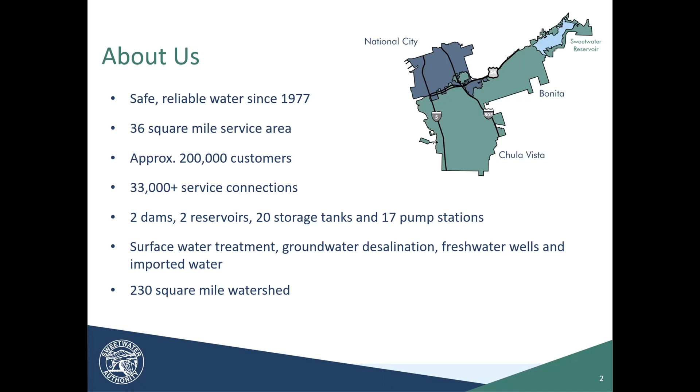And so, surface water sources and protection of those sources. So 2 reservoirs, as I mentioned: Sweetwater Reservoir, located here in Spring Valley, and Loveland Reservoir, located up in the Alpine area. The 2 reservoirs are actually connected via the Sweetwater River.

We're continually monitoring activity and development within our watershed and around our reservoir, because we have a vested interest in protecting the water quality in the reservoir. We have a team of watershed caretakers, which Eric oversees, and they play a very important role in not only operating our recreational programs, but also ensuring the security of our facilities, maintaining access points and roads, and brush clearing around the reservoir properties.

We of course monitor water quality in these reservoirs to keep track of making sure it's good water quality and meeting all the state and federal drinking water regulations. We also have what's called an urban runoff diversion system, I'll show you that on the next slide. And we have a comprehensive habitat management program that I'll talk a little bit more about on another slide.

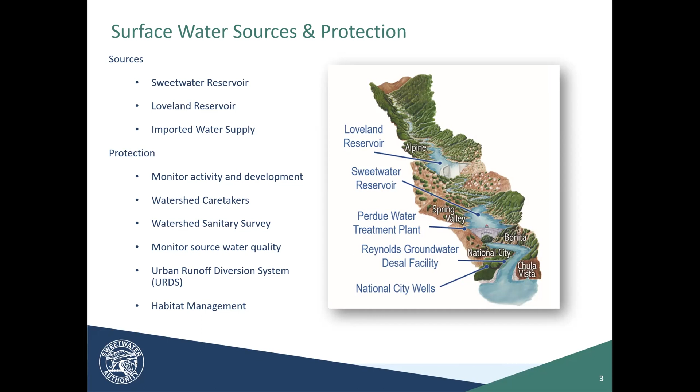Our urban runoff diversion system is actually a pretty unique system for a surface water reservoir. If you've ever driven down Jamacha Boulevard, you may have noticed some ponds just to the north of the reservoir. Those ponds are actually part of the urban runoff diversion system.

The purpose of those ponds is to divert water into the ponds that we don't want going into the reservoir. So if there was a chemical spill or some kind of contaminating activity going on, we don't want that water to go into the reservoir. We can catch it in the ponds, or just a first flush event. So after a long dry summer, a lot of debris and things you don't want in the reservoir build up in the streets, and we capture that water in the pond so it doesn't enter the reservoir.

Yes, I see a question. This is Laura, are you going to take questions at the end, or do you want us to just interrupt you? Either way, go ahead. We will take questions at the end, but you can go ahead and ask a question. No, I can wait till the end. That's no problem, I'll wait. Okay, alright, Laura, I prefer you do that. Thanks.

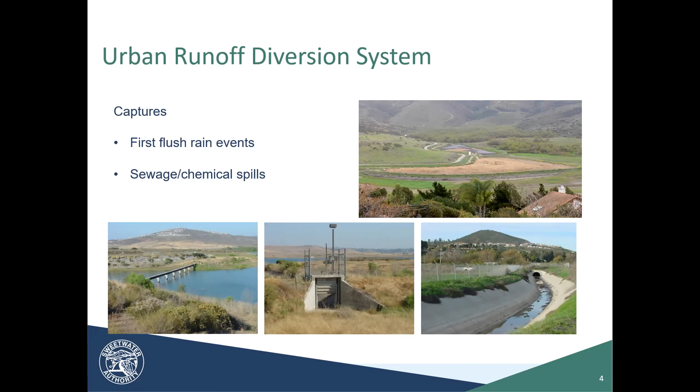So that's our urban runoff diversion system, very important to protecting water quality in Sweetwater Reservoir. We also have a habitat program that we employ to maintain natural flora and fauna around our reservoir. One example is coastal sage scrub, a natural species, but we really do our best to protect the natural environment around here and try to maintain natural plants versus invasive plants.

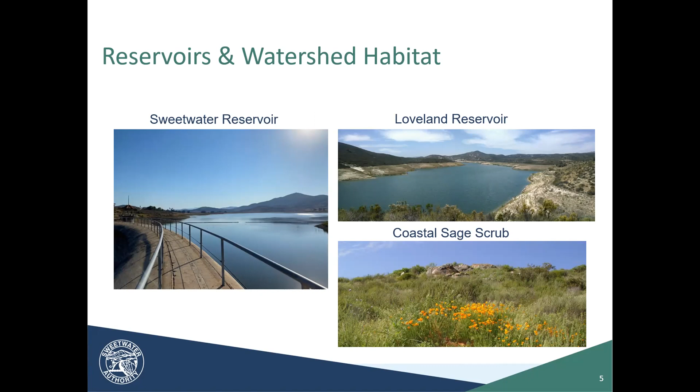This is really conducive to a healthy watershed, and there's a strong nexus between water quality in your reservoir and a healthy watershed, because these plants in this natural environment also act as natural filters, protecting water quality and keeping things like erosion and sediment from accumulating in the reservoir, which would degrade water quality and make treatment more difficult.

Adjacent to Sweetwater Reservoir, we have the Perdue Water Treatment Plant. This is our terminal reservoir where we withdraw water and then treat it for distribution to the public. The primary source for the Perdue Water Treatment Plant is Sweetwater Reservoir and Loveland Reservoir.

But when we don't have local water available, because the reservoir may not always be full, we do have imported water connections to the San Diego County Water Authority. They purchase water from Northern California and the Colorado River system, and then deliver it to a multitude of member agencies in the region.

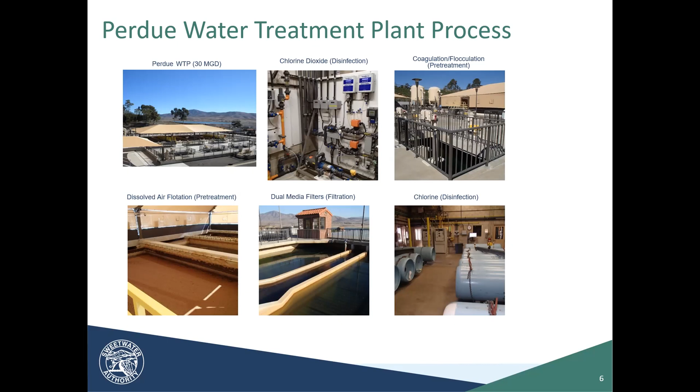The Perdue Water Treatment Plant can process up to 30 million gallons of water per day. It's a multi-step water treatment process, but really the primary objectives are removing total suspended solids from the water, removing color, removing odor, and then inactivating any viruses or bacteria before it's delivered to the authority's customers.

The authorities are also fortunate in having local surface water supplies, and we also have groundwater supplies in National City and Chula Vista. In National City we have what's called our National City Wells, a 2 million gallon per day fresh groundwater source. It's actually one of our most affordable water sources.

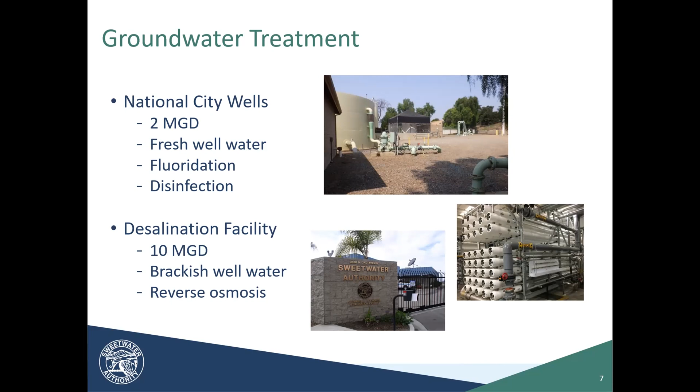It's fresh groundwater, and we simply fluoridate it and disinfect it for drinking water purposes. Then we have the Richard A. Reynolds Groundwater Desalination Facility in Chula Vista, located on 2nd Avenue adjacent to the Sweetwater River. It's withdrawing brackish groundwater, which is salty but less salty than seawater, from what's called the San Diego Formation, a big underground aquifer. We're using reverse osmosis technology to reduce the salt content for potable water purposes. Again, another very valuable local water resource for the authority.

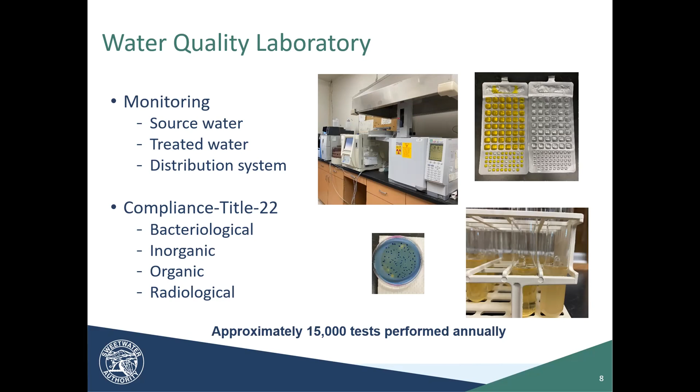All the water we produce and the source waters we monitor, we need to check somehow. So we have our own state certified water quality laboratory, located on the property of the Operations Building at the Perdue Water Treatment Plant here in Spring Valley. We check our source water, our treated water leaving the treatment plants, and also the water out in the distribution system prior to being delivered to the customer. We're looking for bacteriological, inorganic, organic, and radiological constituents, performing about 15,000 tests annually in the water quality lab. At this point I'll hand it off to Eric.

Thanks, Justin. Speaking now about the recreation opportunities around Sweetwater Reservoir specifically, since that's the one adjacent to your community: we have a network of hiking trails, and besides hiking there's also biking and horseback riding allowed. This network of trails is operated through an easement granted by Sweetwater Authority to the County of San Diego.

There's a trailhead that starts at what's called the Sweetwater Summit Regional Park, located towards the south side of Sweetwater Reservoir in the community of Bonita and Sunnyside. That's a county park, not our park, but it's adjacent to our property, and that's where the network of trails initiates.

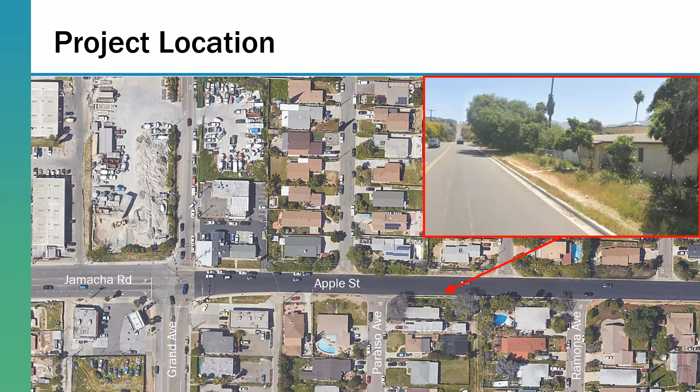So this is going to be sidewalk on the south side of Apple Street between Grand Avenue and Ramona Avenue. You can see in the aerial view that Jamacha Road has sidewalk already, and then as you go on to Apple, it ends. In the street view, you can see there is a place to walk, but it's very narrow and not ADA compliant.

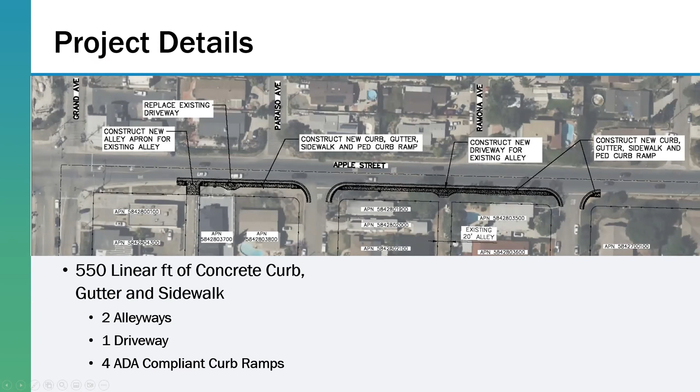So the project is 550 linear feet of concrete curb, gutter, and sidewalk. It starts at the end of the existing sidewalk, crosses over Ramona Avenue to the other side, and includes 2 alleyways, 1 driveway, and 4 ADA compliant curb ramps.

I wanted to spend a little time on the history of the project. I understand the CPG priority list has been updated - it was updated last year, but on the old list you had Apple Street on either side of Grand Avenue, east of the intersection, and then going down toward Galapagos Street and Maya, that intersection down there.

I used to be the liaison for the county with Spring Valley CPG, and I used to attend the Spring Valley revitalization meetings. So I was very aware of all the sidewalk priorities you had, and it was always number 1 on the infrastructure list. So I did apply for grants to try to win some money to do these sidewalks, and Apple Street was one that kind of rose to the top. It checked a lot of the boxes for what typically wins grants.

It's an underserved community area, and it is a direct access to essential services and schools. So I applied just for that section, between Grand Avenue and Ramona Avenue - typically with grants, smaller sections have a better chance of being awarded, and we're happy to do incremental improvements.

Unfortunately it didn't win, but going all the way back to the 2020 Spring Valley revitalization meeting, after the meeting I got a call from our traffic section - they were on the meeting as well. They said, hey, we have some funding available, or it will be available in 2021, and you mentioned you're not able to fund these sidewalk projects, so do you have any that you'd like to propose? And I said, great, I have Apple Street all ready for you. So we got to fund it.

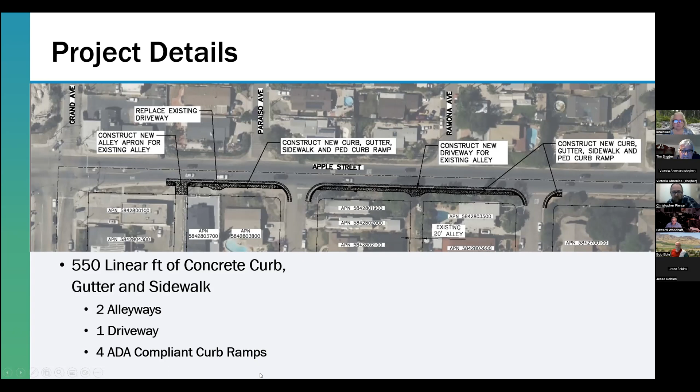This is exciting. At Apple Street, I believe that's where Apple and La Presa meet further south - two streets that come together, and they have the stop sign there at Apple. It's been kind of a problem for a while. Yeah, I can see it coming in here, those two - they had quite a few problems there, and they did put in a stop sign several years ago. We met out there with Zubir, and I don't know what the status of that is now. It's really great to be having this happen. Thank you very much.

Tim, a couple of questions. One, what's the parking situation along that stretch of the street? Is there no parking, or what's the circumstance? I believe there's no parking there, I think it's too narrow to have parking. Good, keep it that way.

Second question: even though it was done in the right of way, was there any community outreach, talking to the residents along there about what's going to be happening? So I sent out the 50% plans to everybody on the south side of Apple Street, about 500 feet south of the project, so all these residents that would walk up toward Apple Street got copies of the plans and a brief informational sheet about the plan and the timing. Did they have an opportunity to react back or comment? Yeah, I gave them my contact number and information, and nobody's contacted me yet. So, yeah, the sidewalks are a huge thing for us. We thank you for doing this, reaching out for the grant, and working with the traffic advisory people. But I also want to make sure the community realizes sidewalks are a blessing, and if they didn't react back, that's a good sign.

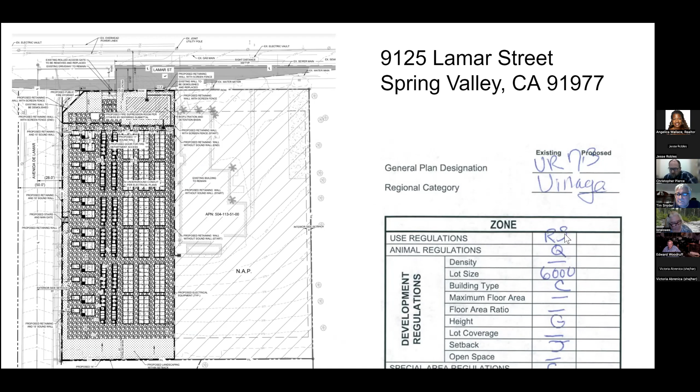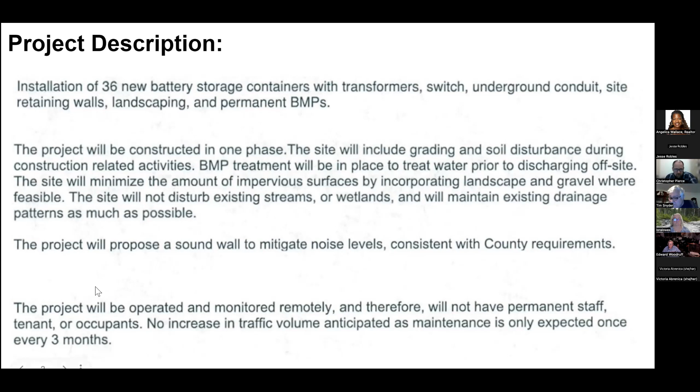Here's another look at it. This is Lamar Street, this is Avenida de Lamar. Here are the battery packs, and then the other—I'll let Skyler get into that. There's going to be a retaining pond in the front for all the runoff water to be treated before it goes into the system.

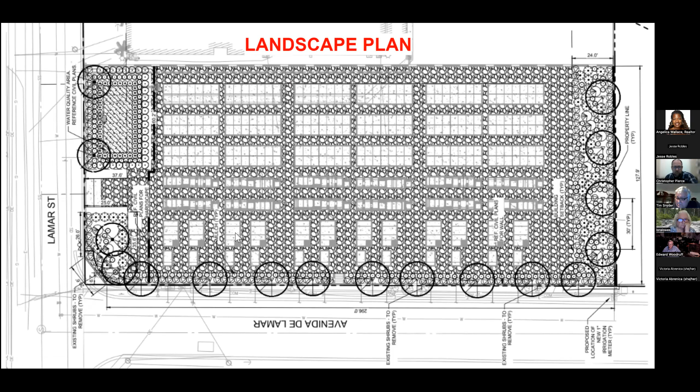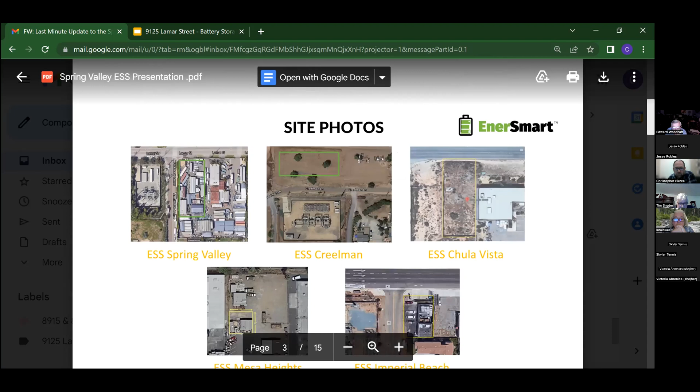This just shows some site photos and where we're placing these. Spring Valley project is up there on the upper left. We also have one in Ramona, at the Creelman substation there in the middle. That's ESS in Chula Vista, the one on the upper right. That one's actually currently in construction. You guys are welcome to go by that site whenever and take a look at what we're doing. We do have the pads poured and the equipment is starting to be placed now, so you get a good idea of what it's going to look like. I can also show some photos if you'd like to see those. Mesa Heights, one of our smallest sites, and then Imperial Beach. All of these are currently in permitting either with the county or the local city jurisdictions.

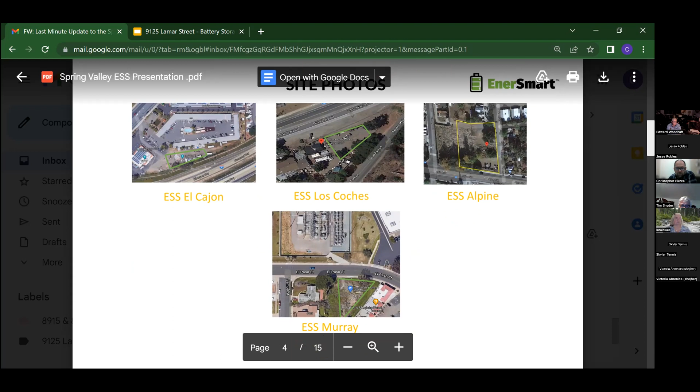Same thing, just more of our sites. El Cajon is actually going in the back of a women's shelter. I'm going to put 3 megawatts on that one. Los Coches is a single 3 megawatt site. Alpine, we're doing 2, and then Murray, we're going to have 21 megawatts on that site. As you can see from all these photos, they're all strategically located right next to the substations.

Chris already showed you that, and you guys have already seen these showing the existing versus the proposed.

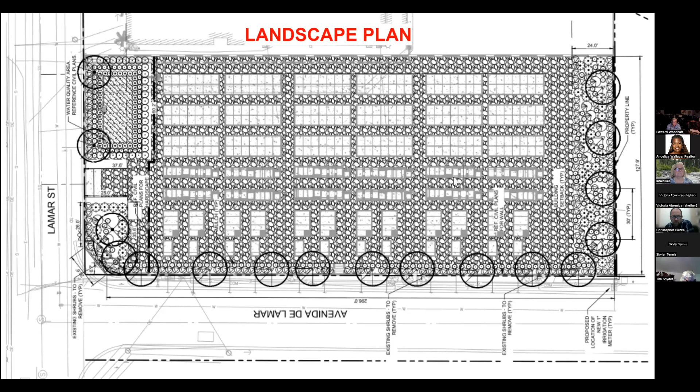Okay, I'm going to go over a few other things really quick, and then we'll open it up to questions. I see people have their hands raised. If you would, Chris, can you pull up the site plan? I had some other topics I wanted to talk through that weren't included in the presentation.

So the first question we get on these generally is fire. What are you going to do if there's a fire? What's the response? How do we get it handled? We've been working very closely with the local fire department on all of these projects. This one specifically is going to have a manifold system at the front, and each one of these battery containers has an inlet for a fire hose. So rather than asking fire personnel to go up to anything that's on fire and connect a hose, we're putting a manifold system right there in the lower left. That'll allow them to have a direct connection to each container. If there was ever a thermal event, they just hook up from a safe distance, flood the container, and there's no more fire.

Sound mitigation is another big topic on these. These do have fans, just cooling fans, nothing crazy, but I believe the levels are about 65 decibels at 1 meter. When doing these sound studies and you put this many units together, the engineering amplifies when you have that many. So following county standards, we've ensured that we'll mitigate the sound below those levels at the property line. To make everybody feel more comfortable, we model these in the sound studies as if all of them are operating at once. The way these are connected to the substation, that won't ever actually happen, so it's a very conservative study. You should not be able to hear these outside of that sound wall.

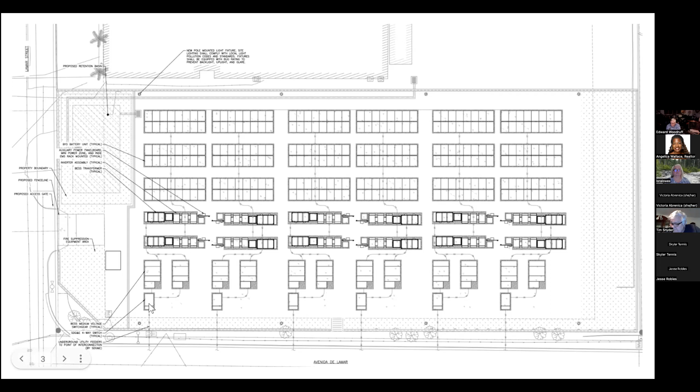All right, thank you. All right, so I'm going to go over this. John Eugenio, Jim Christo and I have gone to the site a couple times to check it out, along with Skyler, the engineer, and we actually got the planner to come out and also walk it with us.

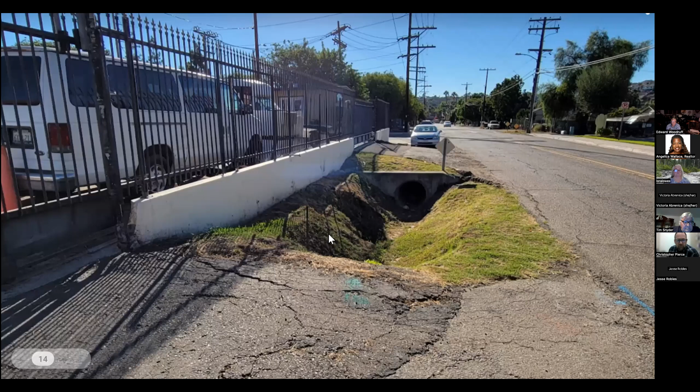Some of our concerns was this in front of the property. They have a 20-year lease and they're looking to improve it. They saw when SDG&E did the substation, they put sidewalks in across the street when they developed that, they had to put sidewalks in. So we're looking for a suggestion for some type of improvement here so we don't have to look at or deal with this for the next 20 years.

Another thing is to repair the damaged sidewalks along Avenida De Lamar. In some of my supplemental photos, you can see where the existing plants and trees have lifted the sidewalk in areas and it's been patched with asphalt. He said most of those sidewalks are going to have to come out anyways when they do the trenching along there, so that sounds like it's not going to be a big issue to do that.

We did identify an issue on the south property line. The residents' property kind of just drains into this little makeshift ditch and then onto the street. So we're asking them to look at engineering a solution to make sure their retaining wall doesn't become compromised from the water put on that wall from those properties.

If those units that he just talked about are removed from the project, it would maybe allow for the sound wall to be pushed further in. Right now it looks like they're having the sound wall right on the sidewalk. We'd like to see, or the suggestion to have, 4 to 5 feet parallel to the sidewalk strip where there can be some type of zero-scape.

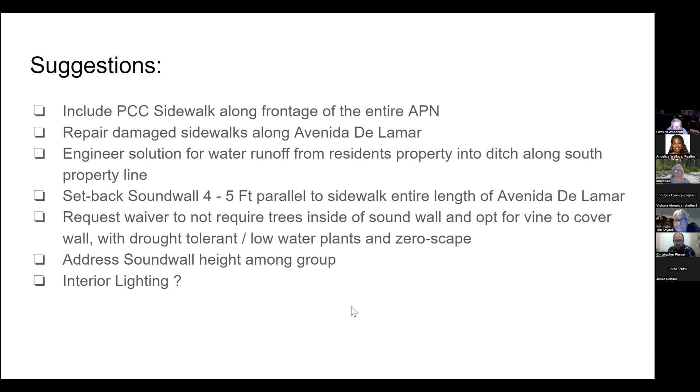And so I will leave it to the group now. Let me see who has their hand raised, or Victoria, if you want to go through that.

Hello, yeah, thank you so much for working on this project, Skyler, and thank you Chris also for presenting. I really appreciate that you're adding battery storage in Spring Valley. Skyler, earlier you mentioned that this was going to be better than peaker plants, and I was wondering if adding this project and the ones you mentioned earlier would possibly lead to the closure of the peaker plant in El Cajon.

Oh, well, it's a step in the right direction. I can't say that these projects specifically, with this 123 megawatt portfolio, would be able to shut down that particular peaker plant, but again, it is a step in the right direction. These types of projects, and then the more these projects are built, are going to be what drives the shutdown of a plant like that.

So yes, it'll help, but no, I can't guarantee that it'll be enough to shut down that particular plant.

Okay, thank you. And do you know if the energy stored here in Spring Valley, if a majority of it would be used here?

Yeah, so electricity goes where the nearest load is. We don't have any control over where it goes, but the fact that we're connecting at this substation, and the fact that it's only 36 megawatts, it's not going to go outside of that substation. So the local community will absolutely be benefiting from this and the discharge of this power.

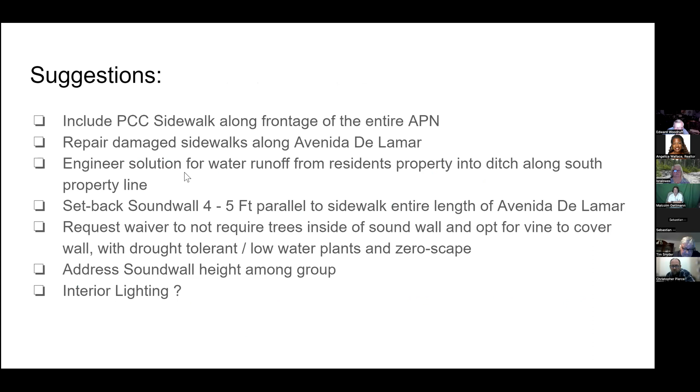Ed Woodruff. Yes, you've answered a couple of questions I had. That one drainage area that's open, as far as runoff from your property, does it go into that ditch? Yes, it hits the retention basin first, and then that goes to where the site naturally drains. So it goes into that pond on your property first, and then out to this.

Correct, sir. Okay, and then the lighting inside, is that on all night long, or just? So we haven't really gotten that far. It can be, we can do motion sensors. That's what we're doing at one of our current sites, where it only comes on if there's motion inside the site. So we're open to suggestions, if you guys want it on all night we can do that to deter. Well, not necessarily, I just wonder if it was or not. Right, no, the first site we have under construction is just on motion sensors.

And then there seems to be some, I don't know what's causing this, I've heard rumors that the neighborhood around is extremely concerned, some of them have the feeling you're storing acid batteries there and all of that. So I hope they get to know what actually is there, not what they think might be there.

Yeah, and I've gotten a lot of those types of comments. So I'm happy to speak to that, or maybe present something that shows a little bit more about the lithium iron phosphate.

It's not a liquid. There cannot be any spills. It's all solid. Well, thank you for coming in and presenting.

Hey, this is Jim Cousteau. I might add that lithium iron phosphate batteries are now being used in a lot of motorhomes, and they're so well sealed that they put them right in the living space in the motorhome. They don't have to be vented outside like your old lead acid batteries.

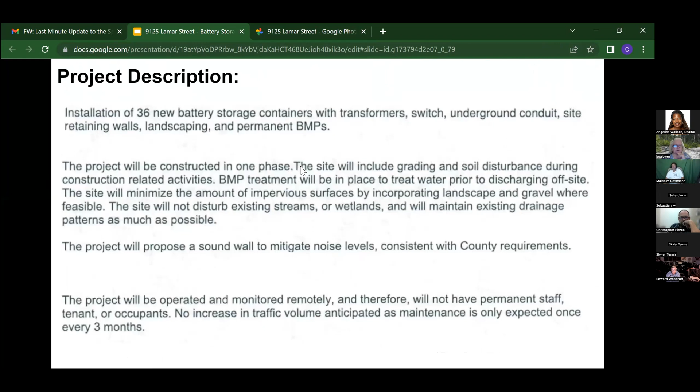I'm sorry, this is jumping around so much. No, I'm sorry. Yeah, there you go, it's staying there. Okay, thank you.

The fans each produce 60 decibels. It's around, I believe it's 65 actually. And how many fans are you going to have? There's one set on each battery. So that's going to perhaps end up providing a lot of noise.

Wouldn't you say it's not the sound of a refrigerator? Like I said, when you put them all together, it does amplify, if you're speaking to a sound engineer, and they do put that in the model, which is what's driving the 14-foot sound wall.

How many of these units that have the fans in them are there? 36. So that's 186 decibels, right? Nope, no.

It amplifies, but it's not linear, it's not 65 times however many units. It amplifies, but I'm not a sound engineer, I can't speak to it 100%, but it makes it louder when you have more. Again, it's not linear, it's not just doubling because you have 2 units. If that makes sense, I'm still kind of concerned about the noise from the fans.

And the lights to light the interior of the site should probably go even with the sound walls, because isn't there an apartment complex across the street from there? Does anybody remember? I don't know if it's exactly across the street or down from there.

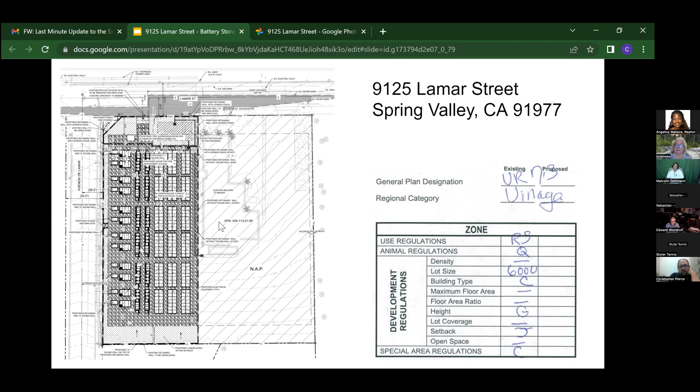And I liked your landscaping plan. I thought that was very nice when I saw it. So other than that, I think all my questions have been answered. Thank you so much.

Yep, and just to add to the sound too, those fans will only be operating when the batteries are either charging, discharging, and it's hotter than a certain ambient temperature outside. So do you know how often that is?

I don't, but my point was it's going to be during the daytime that these are going to be operating at full capacity and have fans on. Whenever we charge, they're only charging 20-25% capacity, so there's no reason for those fans to be operating, and we would be charging in the off hours, anytime after 9 o'clock.

And since Avenida de Lamar is the only escape exit for the people that live up beyond your site, and the proposed or approved plan for 15 townhomes on the other side of the street, so if there was an emergency, it's conceivable that they would not have a way out.

I can see that the risk from this is very low here, but doo-doo happens sometimes, and it's our responsibility to try to do the best we can to make it as safe as possible for our community. Absolutely. So that's just a concern that I have, and it's going to bother me forever, and I hope it doesn't happen.

But part of the UL listings on these, just to make you sleep a little bit better at night, is that even though they can catch fire, nobody's denying that, the listing requires that they cannot propagate to another container or anything within 5 feet of that container that's on fire. So even if one did catch, the likelihood that it would catch everything else on fire is extremely low.

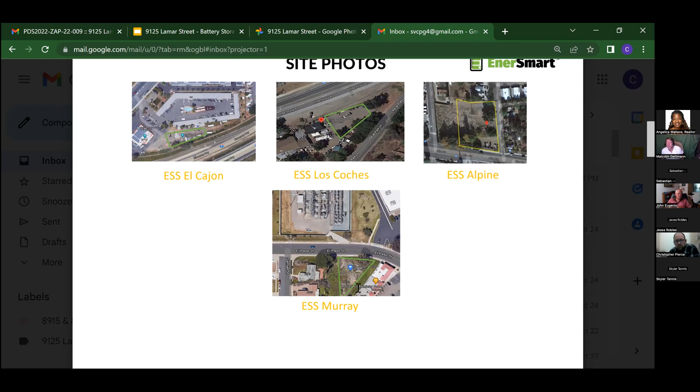Okay, because my concern is why put these things next to homes, just in case these things happen. Understood. I wish that we could put these things anywhere, but unfortunately it is relevant to the location of the substation. If you'll notice on all of these, you can pretty much see a substation right next to each one.

Okay, and you also mentioned, like Laura had said, if we had a blackout, that's what your power was going to be for, to give us power in Spring Valley. So what is the purpose? The purpose is to prevent that power from ever going out because of brownouts or anything. Right now, it happened I believe a month ago down here in San Diego, they were giving notices to turn off your air conditioner after 4 o'clock, or they were shutting off power voluntarily themselves. This will help avoid those scenarios. But no, it will not provide backup power in the event of a grid outage.

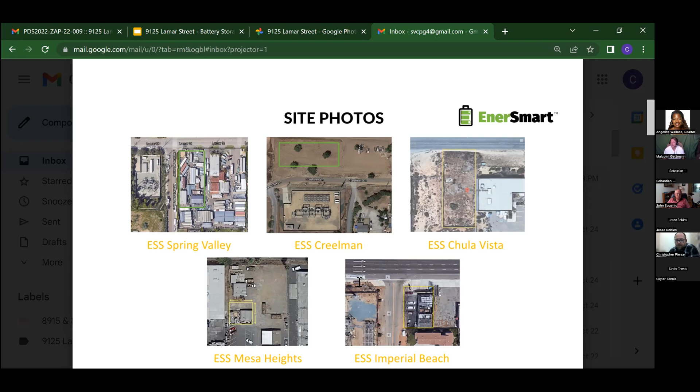That would— Skyler, you had mentioned how we sell power when we overproduce. I don't know if we do. I know it goes to other states, but I don't know how, and I don't know if we sell or not. That's way above my pay grade, but I do know that there is current power from solar that's being exported elsewhere.

Okay, that's all I had. All right, Malcolm.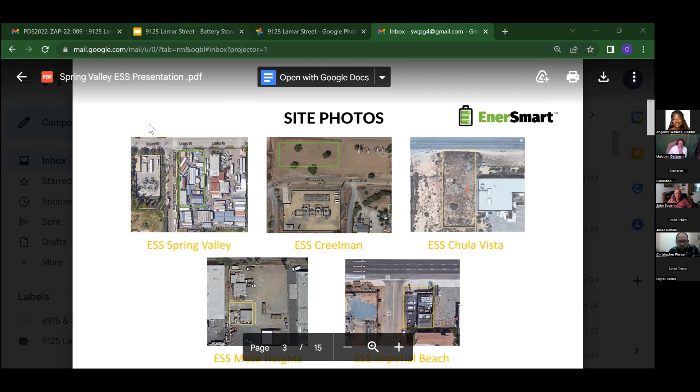Can we go back to the site plan that showed where the pond is? There we go. So you're going to have a holding pond, and if I heard you correctly, SDG&E wants their equipment in the SDG&E right of way, which would be outside of the perimeter wall. Is that correct? Correct, sir. Yes. So that wall would be on the opposite side of Avenida De Lamar street, it'd be on the substation side, and there would be utilities running underneath the street.

So there is the ability then to move that wall back a few feet to get a line where you could plant appropriate vegetation around that sound wall without any difficulty. And then what I'd suggest is, if you're creating a holding pond, why don't you put a filtration system on there and use that for supplemental irrigation for any vegetation that's there.

And then along with that, I might suggest for the property owners, where you're putting up the 10-foot high sound wall with the 4-foot high view panels, for a total of 14 feet, move that wall a few feet in and talk to the owners of those properties that are going to be impacted to see what type of vegetation they'd be amenable to along that particular area. That's what Verizon Wireless did with us when they were putting a tower in. They came to us and said, we want to put a tower here, and we said, okay, plant this many trees right here in this particular area. They did it.

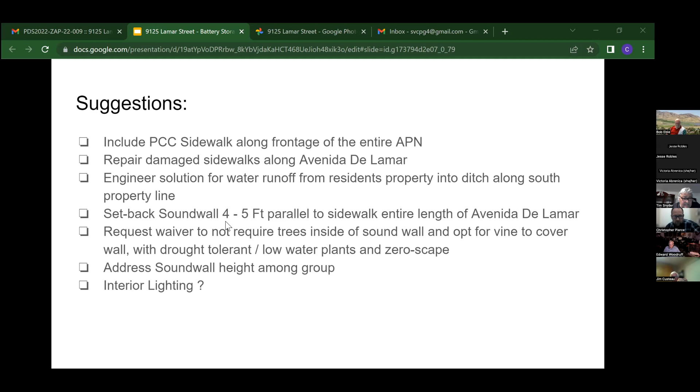Okay, next we'll go to the setback. So, I'm sorry, so something? Okay, so are we asked for a 4 to 5 foot setback with trees landscaped along the entire as proposed, except for inside on the outside? So yes or no for that, and then a yes or no for trees inside the rear. Does that make sense? No, I'm sorry. Could you run through that one more time for me for the minutes, please?

So the first yes or no is going to be for a setback with the trees as described in the landscape plan outside of the sound wall. The second one is if the 4 trees should be required inside the sound wall. So is that first option with the higher wall? The first option is a setback. It's just a setback. He said the higher wall would be on the south property line.

Okay, perfect. So Tiffany Gonzalez absent, Laura Lowe's for the first option. Laura Lowe's. Did we lose her? It looks like we lost her. I'll come back to her.

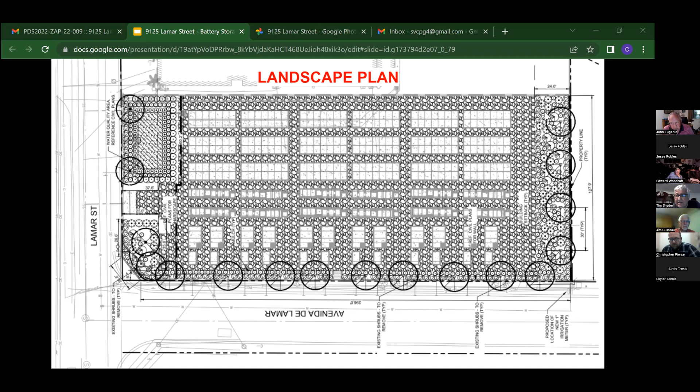Thank you, everyone. Now, I got something before you go, Tim. Oh yeah, I want to thank Chris for taking this on. I knew it was going to get a lot of concerns with the vegetation, and I thought what they planned, what they showed here tonight was a pretty good idea of what should be done.

Thanks, Chris. Thanks, John. Now the fourth item in informational is about the recommendation for approval for the Climate Communities Award for Spring Valley. This is mostly just telling you what is happening. There's no one here from the Climate Action Plan with us tonight, I don't think. I just did this to tell you there's a council meeting on October 27th, and it's going to be virtual. It's a state meeting, but they would like input from the public or even members of the group. So I'm going to be attending and see what this is all about.

But it sounds like a really positive thing. And the stakeholder groups involved are probably going to get an award to start doing some planning. The description here is fairly self-explanatory. I don't think we really have time this evening to describe it, but I would say the best thing to do is to attend that meeting two days from now, if you can, based on scheduling, to get a good idea about the Strategic Growth Council's recommendation.

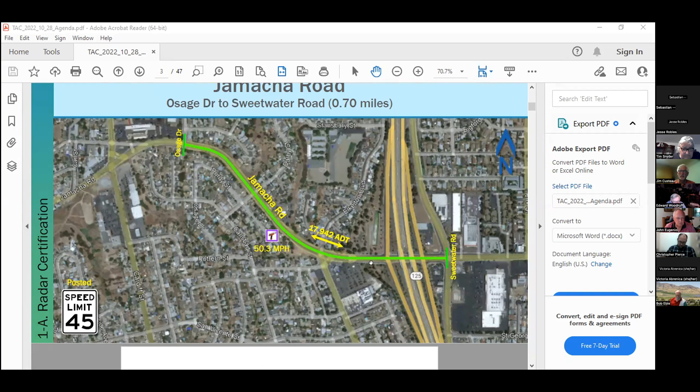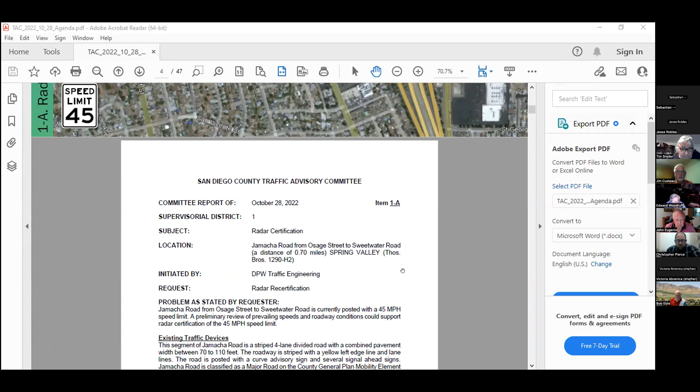Periodically we do the TAC, I'm no longer on TAC, pending potential appointment by District 4. And they look at all the conditions of the road. What I tend to look at, and many of us on the committee in the past have looked at, is if you look here, let me blow this up a little bit. If you look at the speeds in 2022, unfortunately this has been going on a lot in the county, especially in our area.

Notice the difference in speeds between 2015 and 2022. They try to do them at a similar time of day, similar weather conditions, and so on. So you can see the pace has increased. This is a pretty significant increase here. And the part that concerns me the most is there have been 111 reported collisions, 37 of which involved injury, in the 3 years from 2019 to 2022.

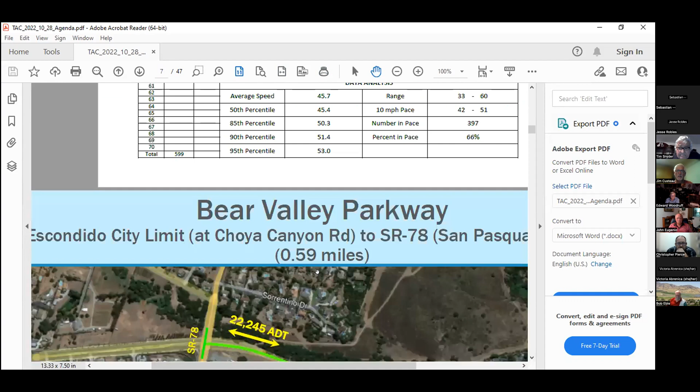These collisions result in a segment accident rate of 8.09 collisions per million miles of travel. And you're going, well, that doesn't mean anything to me. Well, when you look at the statewide average for a similar roadway, suburban divided 4-lane roadway, speeds of less than 55 miles an hour, the average in the state is 1.18. This is probably the most egregious, terrible collision rate that I've seen on any of the roadways we've done radar recertification on in the 3 years I was associated with the Traffic Advisory Committee. So, I believe they're suggesting that this could be recertified to 45 miles an hour. Let me get, yeah, it's probably at the very top.

Yes, so this is currently posted at 45. We look at this first paragraph. A preliminary review of the roadway conditions could support radar recertification of 45 miles an hour.

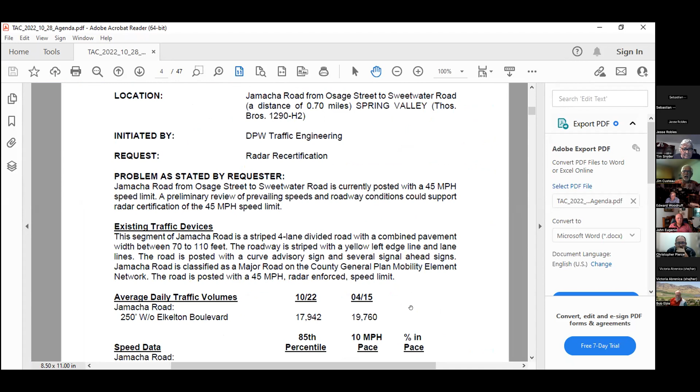I would like our planning group to go on record as suggesting the speed limit, due to very high accident rate, be lowered to 40 miles an hour, if it can be done and stay within the state standards. I believe it can, and I would request that to the TAC.

Additionally, I would like our planning group to support an investigation of this section of roadway to review the types of collisions and see if there's any kind of engineering changes that could be made to the stretch of roadway to help reduce and mitigate the high accident rate. I'd like to have support from our planning group.

That's my motion. So moved. I'll second that motion. Okay, we're running out, we've got like 5 minutes left. Is there any comment from the group or the public on this?

Okay, then Jesse, if you would, go ahead and take a vote, please. Yes, bear with me one second here. Okay, we have Tiffany Gonzalez absent, Laura Lowe's... think she's absent as well now. Lost her.

Okay, I am a yes. Chris Pierce, yes. That was a yes. Roger's vacant. Okay, I didn't hear that, yeah Chris, that was a yes. Okay, yeah, perfect, Roger's out. John Eugenio, yes. Scott Harris is absent. Scott Schaefer, yes. Rod Gibbons, yes. Chris Pearson is absent. Jim Custeau, yes.